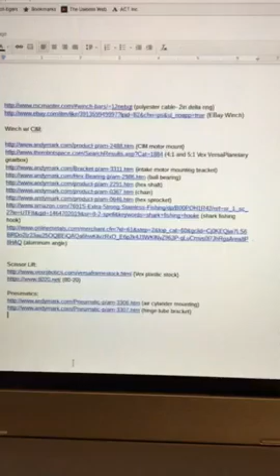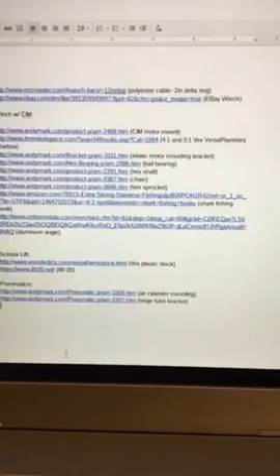This is an update on the scissor lift climber. Before, I had talked about a winch attached to the top of the scissor lift that would potentially lift the robot up. That is probably what we are going to be doing at this point. In fact, we will likely have two, if space and money provide, one on either side of the robot.

To be able to keep the weight even and not tip. I went through with Annabelle today, the mechanical lead for the team, and created a bill of materials for the design. Now, this is what I have. So we did go through and I created a design for a winch using parts that I found online.

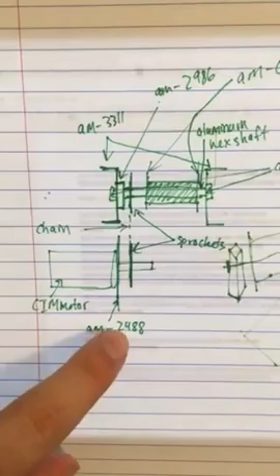Now, this drawing isn't the best, but this is a top view. You can ignore that, that's on the other side of the page bleeding through, and it's a CIM motor on just a bracket that holds it in. That's a standardized part on AndyMark with a sprocket on it. It's going to be sprocketed to a separate system.

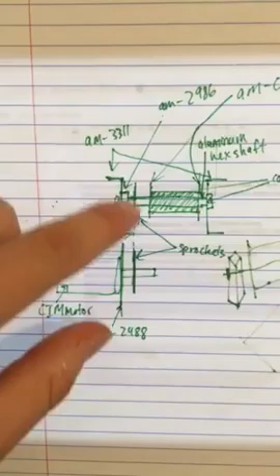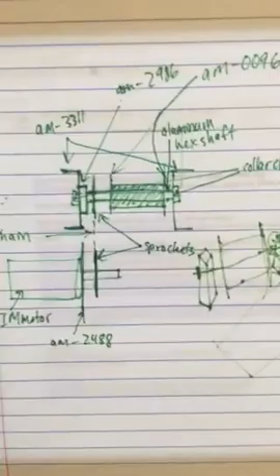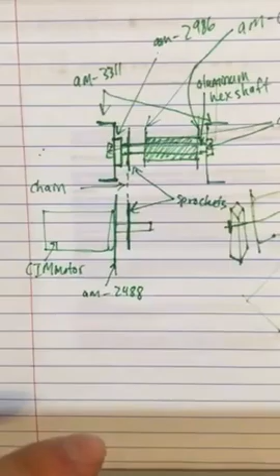These are suspended brackets, AM3311, the same ones on the intake for my current robot. They're just suspended a little bit higher. The reason for that is we want to be able to put the pulley on it, and we'd want a bigger pulley than would be able to be mounted on the CIM. So it would be bracketed, or chained up to that and run on that pulley.

Now that's there if we need it, but a recent revelation... those are the materials that we would need for that. Now, I should also mention that we would use, at the end of the CIM, Versa Planetary gearboxes to reduce the speed or increase the torque at lower RPMs.

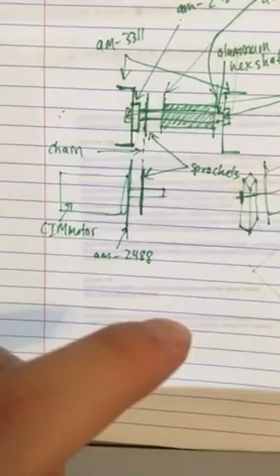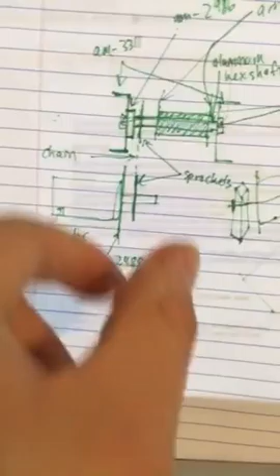That way we could pull the robot up much better. Now, yeah, those would just be extended out here. We'd probably spin this and flip it around and put it on the other side so that the end of the CIM with the gearboxes was out this way for space-wise.

But what we did find was a winch on eBay. There are a lot out there, but not a lot of them would serve our purposes. However, this one, it is on eBay again, has this lever on there.

Now, if we can figure out a way that we can remove that lever—it looks like it's just on with a pin—and actually get a sprocket on there and secure it, we can just use this as our winch and it'll work much better as a more contained system. In that case, we'll be able to do two fairly easily.

Now that's the goal, to be able to do that, and that will be what we're working on the next couple of days. But that's that. We also have the link for the cable. And in terms of the scissor lift, we have...

Vex plastic stock, and that is just tubing with pre-drilled holes. It's plastic tubing from Vex. We'd get the 1x1 version, and that would be our stock for that.

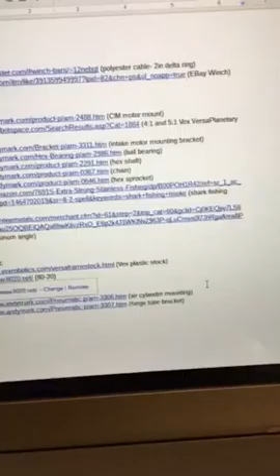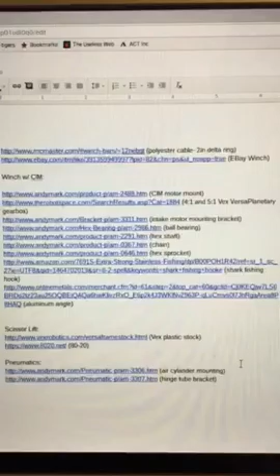No, that's pneumatics, my bad. 80/20, and the way the 80/20 would be set up would be that the bottom bolt on the sliding platform would go into the side of the little block of 80/20 and screw into a slider in there. And I know that is very vague, but just know that it would be secured to the side of the 80/20, and we would tap the bottom of it, or the top, whichever way you'd like to look at it.

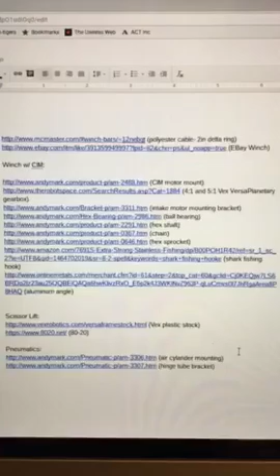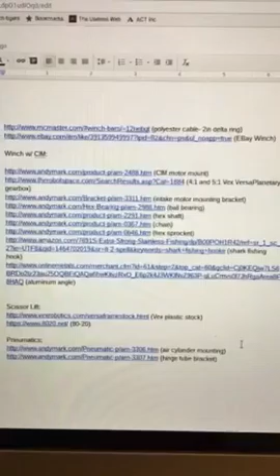And screw that onto the top of the piston. That way we can have a secure system that runs like that. The pneumatic system is just like any other pneumatic system in FRC. There's not much to explain there, but I just found a few mounting things which I thought were relevant, and I'll work more on that later.